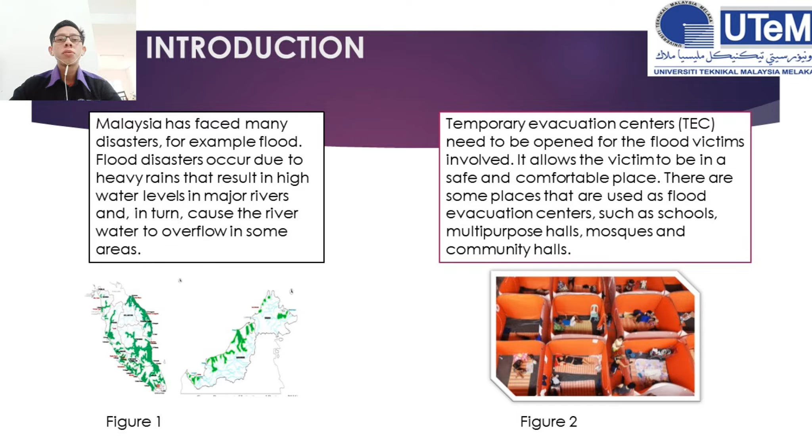Temporary evacuation centers need to be opened for the flood victims involved. It allows the victims to be in a safe and comfortable place. There are some places that are used as flood evacuation centers such as schools, multipurpose halls, mosques and community halls.

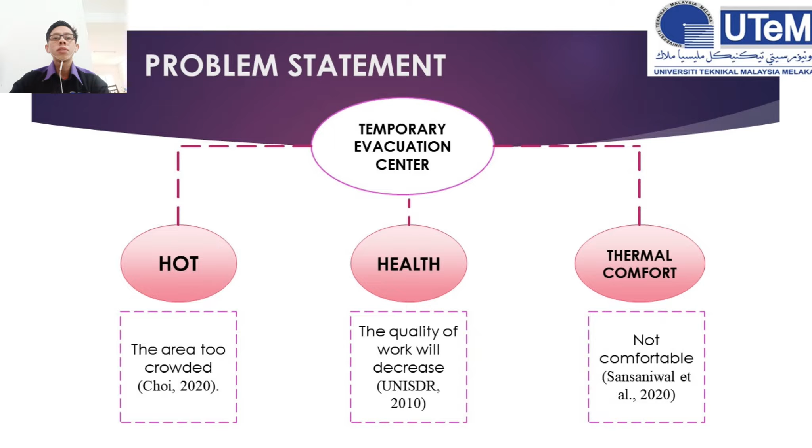Next is problem statement. For this research, there are 3 criteria that are considered. The temporary evacuation centers are hot. That is because the area is too crowded. Next, the quality of work will decrease because the health is not in good condition. Last, the thermal comfort is not comfortable there.

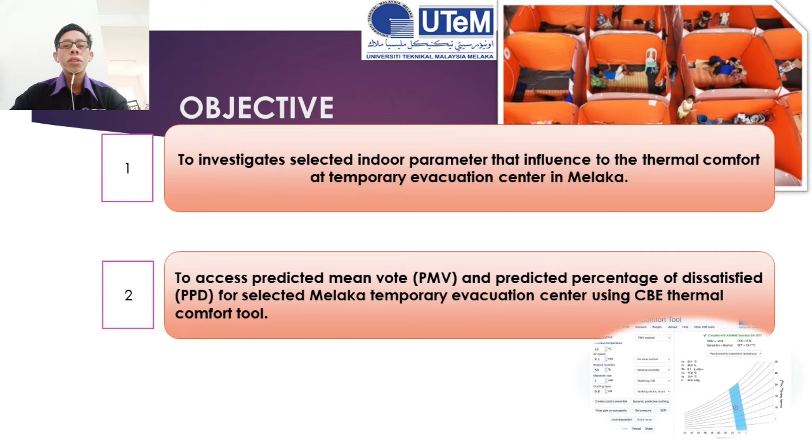There are 2 objectives for the research. First is to investigate selected indoor parameters that influence the thermal comfort at temporary evacuation centers in Melaka. Second is to assess predicted mean vote PMV and predicted percentage of dissatisfied PPD for selected Melaka temporary evacuation centers using CBE thermal comfort tool.

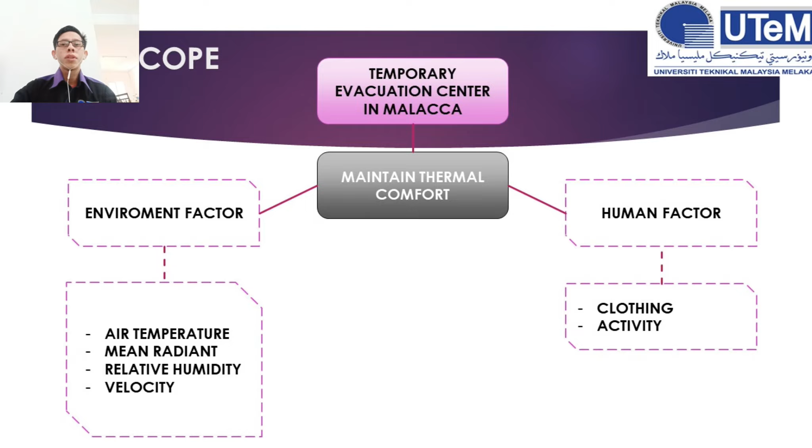Next is the scope. To maintain thermal comfort, there are 2 factors that need to be considered. One is environmental factors such as air temperature, mean radiant temperature, relative humidity and air velocity. Second is human factors, which are clothing and activity.

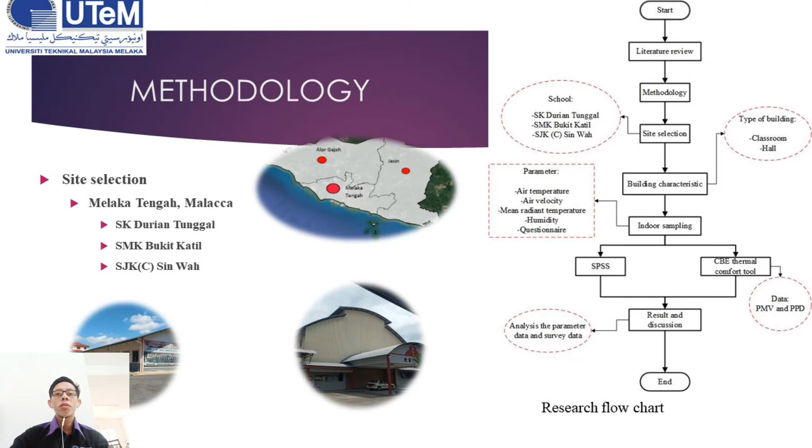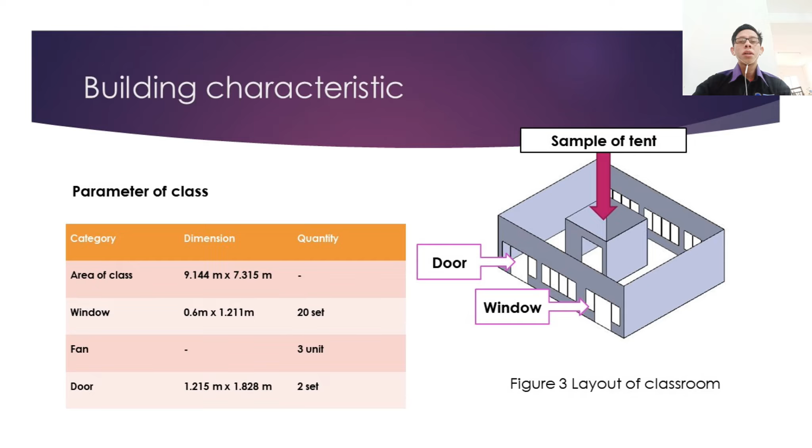Okay, for the methodology, this is the flow chart for this research. In methodology, there are several parts. First is site selection. For this research, I chose 3 schools at Melaka Tengah. SK Durian Tunggal and SMK Bukit Katil use classes as temporary evacuation centers, and SJKC Sin Wah uses a hall as temporary evacuation center.

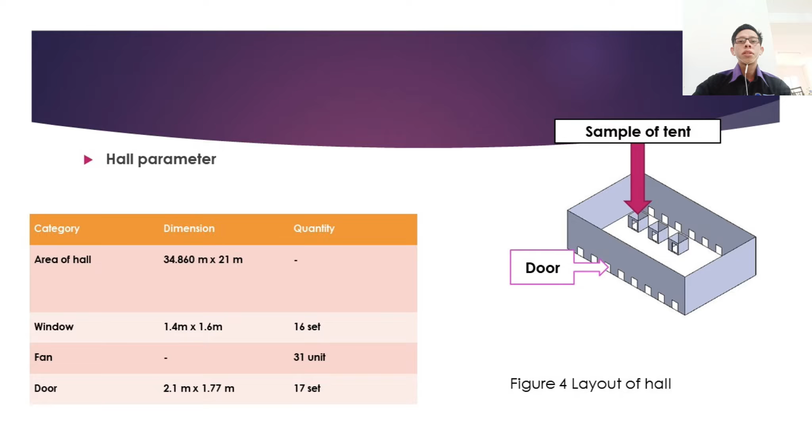Next is building characteristics. This is a sample of class layout and the parameters of the class. Next is hall parameters and the layout of the hall. In the hall is the sample of tents.

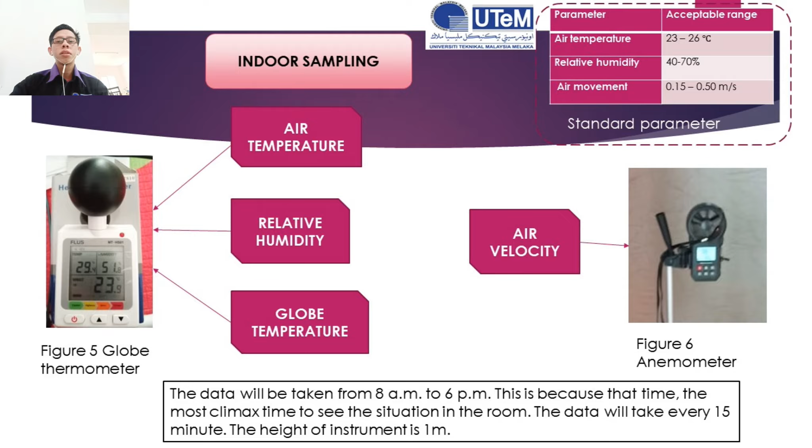Okay, for this research, there are 2 instruments used. A globe thermometer is used to get the value of air temperature, relative humidity and globe temperature. For air velocity, the instrument used is an anemometer. The data will be taken from 8 AM to 6 PM. This is because that time is the most representative time to see the situation in the room. The data is taken every 15 minutes. The height of the instrument is 1 meter above the floor.

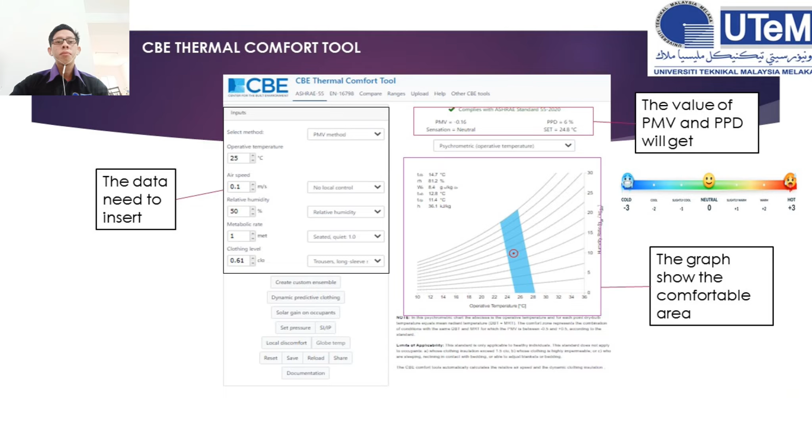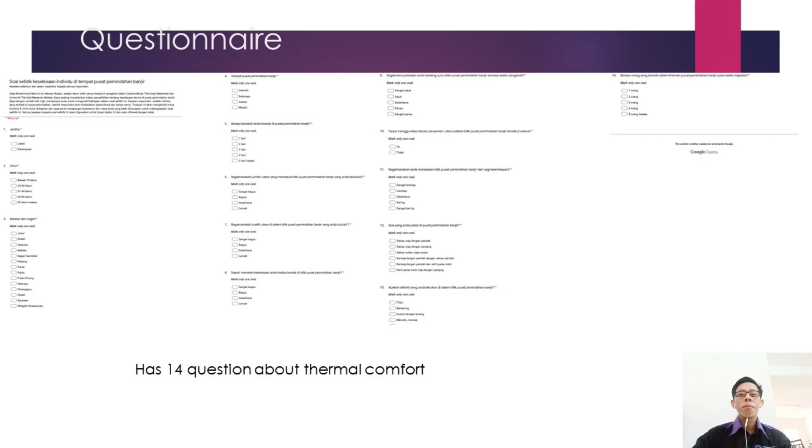CBE thermal comfort tool is used to get the value of PMV and PPD based on readings taken from the temporary evacuation centers. This is the questionnaire used in the research. There are 14 questions about thermal comfort.

Next is result and discussion. The first data collected is air temperature. Based on the graph, there is a combination of the 3 schools. For SK Durian Tunggal, the red line increases from morning to noon. After that, the temperature is in the range of 31 Celsius to 32 Celsius.

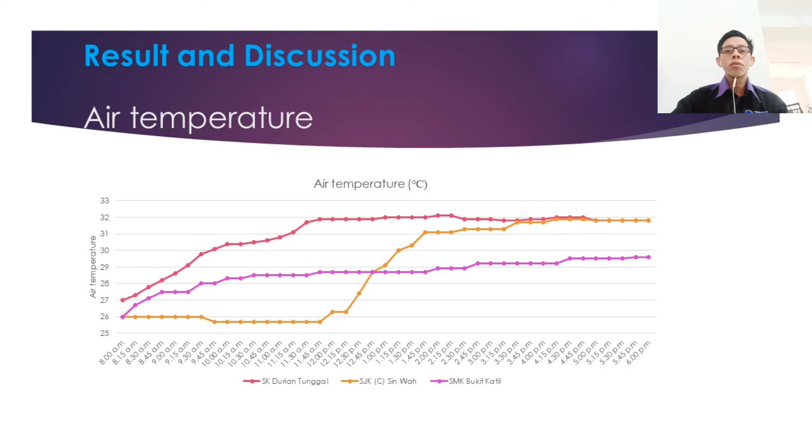For SMK Bukit Katil, the purple line increases slightly because the weather that day was cloudy. But for SJKC Sin Wah, the temperature from morning to noon is in the range of 25 to 26 Celsius. It is because at that time the weather was rainy and stopped at noon. So after that, the temperature increased up to 32 Celsius in the evening.

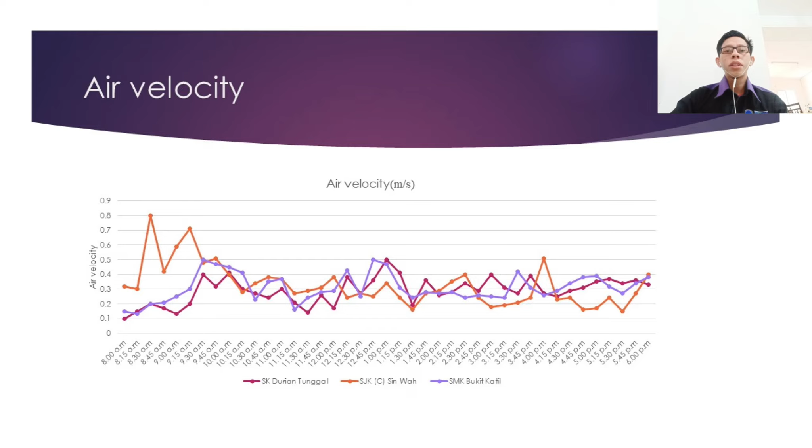Okay, for air velocity, the readings taken from the three schools are in the acceptable range, from 0.15 to 0.5 meter per second. Only a few readings are out of the acceptable range. Like SJKC Sin Wah in the morning, the value is high because of the wind while it was raining.

Next is humidity. Based on the SJK (C) Sin Wah yellow line, the humidity is high in the morning to noon, as the value is 75% to 84%. It shows that when rainy, the value of humidity is high. After the rain stops, the humidity continuously decreases to 51% in the evening.

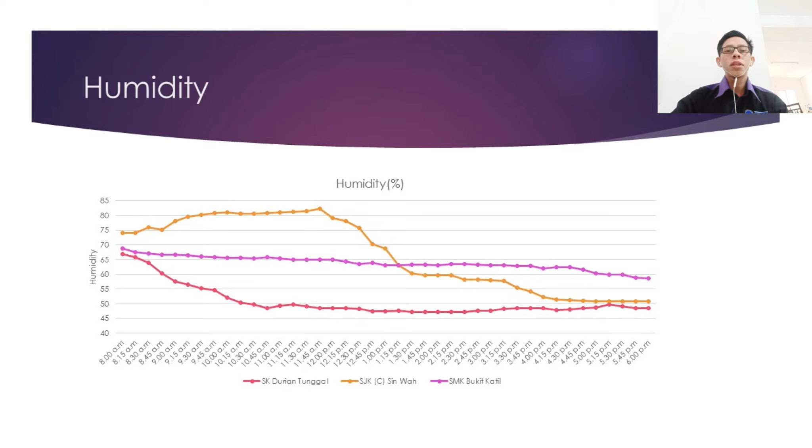As the weather is cloudy for SMK Bukit Katil, the humidity is only in the range 60 to 70%. Meanwhile, the hot weather at SK Durian Tunggal makes the reading of humidity low, at range 45 to 50%.

For the survey data, only two questions are taken as a sample. First is the type of clothes worn at the evacuation center. There are 57 respondents who answered the question. 12 respondents chose sport pants, sport shirts, 20 respondents chose trousers, long sleeve shirt, and 25 respondents chose pants, short sleeve.

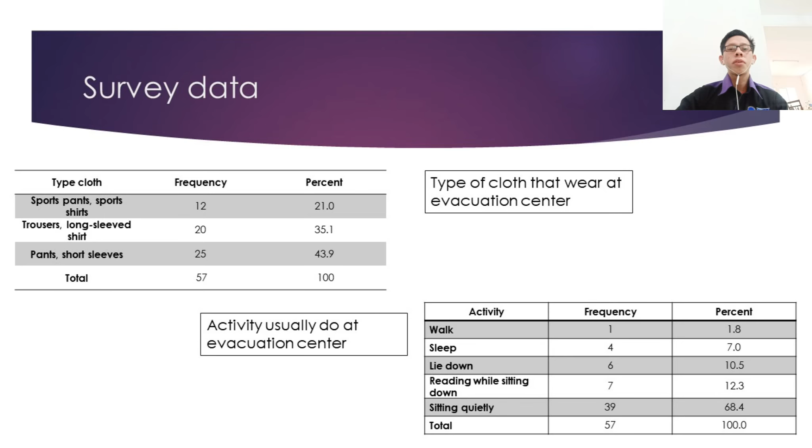Next is the activity usually done at the evacuation center. The most selected activity is sitting quietly, with 39 respondents. For reading while sitting down, only 7 respondents, and 6 respondents for lie down. The lowest is walk, with 1 respondent, and sleep only 4 respondents.

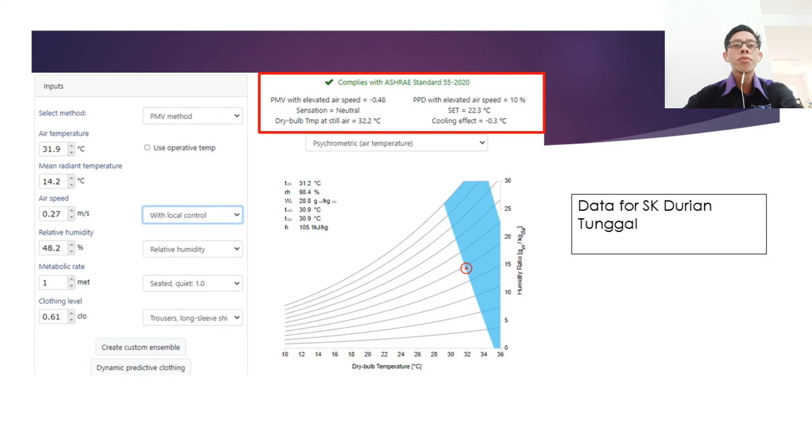Based on the picture, the PMV showed the value negative 0.48 with elevated airspeed, and PPD showed the value 10%. It showed that the classroom at SK Durian Tunggal at 12:30 p.m. is comfortable for the victim as it complies with ASHRAE Standard 55. As the red dot is in the blue zone, the space is still comfortable for the victim. Although the air temperature is not in the acceptable range, the airspeed is high, which makes the space comfortable.

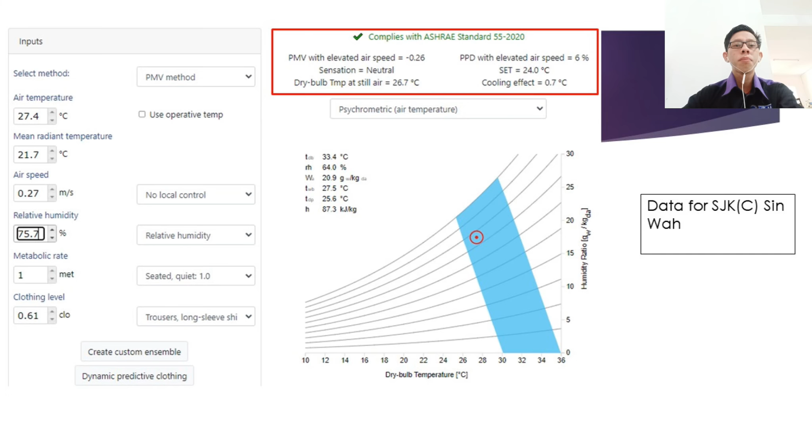Based on this picture, the PMV shows the value negative 0.26 with elevated airspeed, and PPD shows the value 6%. It shows the whole space at 12:30 p.m. is comfortable for the victim as it complies with ASHRAE Standard 55. As the red dot is in the blue zone, the space is still comfortable for the victim. Although the air temperature and humidity are not in the acceptable range, the airspeed is high from outside, which makes the space comfortable.

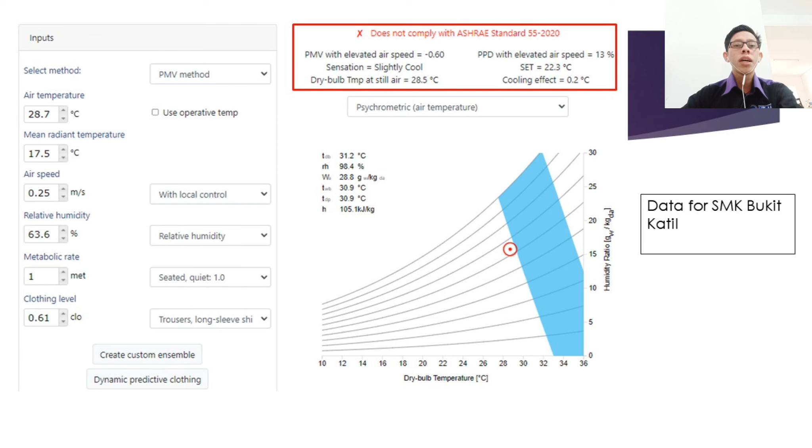Based on this picture, the PMV shows the value negative 0.60 with elevated airspeed, and PPD shows the value 13%. It shows the classroom at SMK Bukit Katil at 12:30 p.m. is slightly cool for the victims who only sit, as it does not comply with ASHRAE Standard 55. But if the victims do some activity, the thermal condition will be comfortable. As the red dot is a little out of the blue zone, the space is slightly cool for victims that sit.

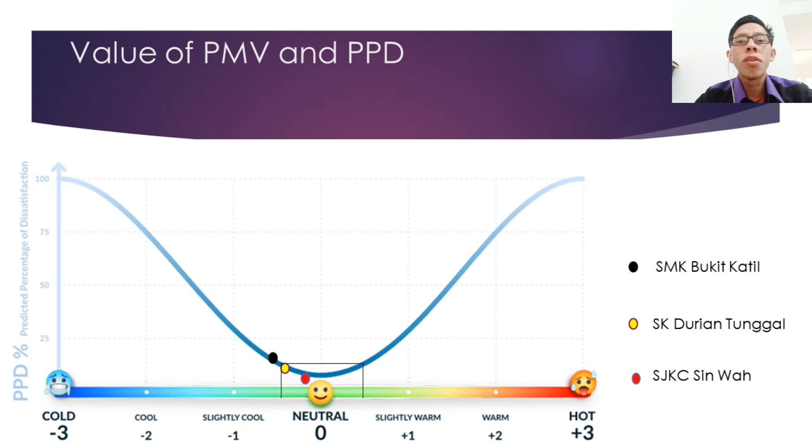As we can see in the graph of PPD and PMV, only SMK Bukit Katil is not in the acceptable comfort zone. SK Duyang Tunggal and SJK (C) Sin Wah are in the comfort zone. The acceptable value for PMV is in the range negative 0.5 to 0.5, and the value for PPD is from 0 to 10%.

The discussion for the research is that the selected sites are comfortable for the victims. The natural factor and human factor will affect the value of PMV and PPD at the evacuation center. The weather will affect the reading of data. The victims are comfortable based on the survey.